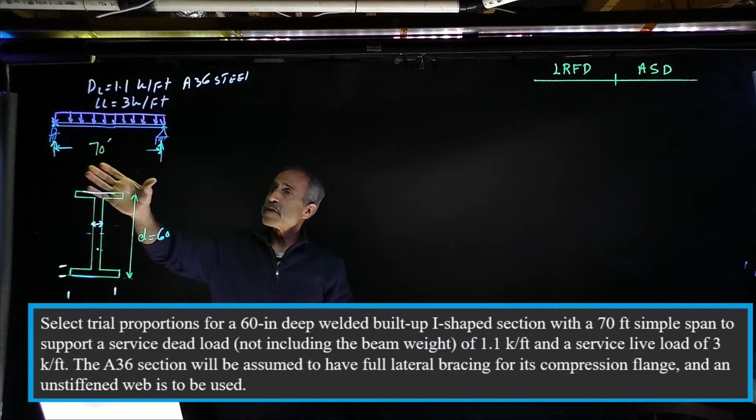Last episode we did the cover plate, and today we're going to go ahead and design a plate girder. So take a look at the problem. As we go along, I'll put stuff on the board so you can see where everything comes from.

We have this beam about 70 feet long, and we want to design a plate girder for it. Possibly 60-inch would be good, and normally the depth could be anywhere from 1/6 to 1/15. In this case, for 70 feet, it comes out to 1/14. So the dead load given for this situation is 1.1 kip per foot, not including the weight of the beam, and the live load is 3 kip per foot.

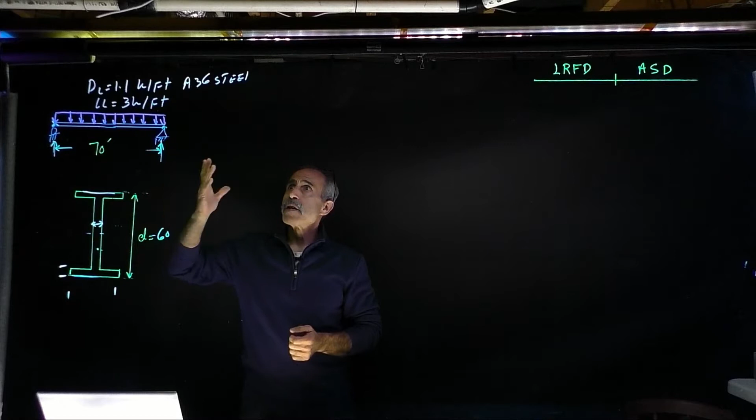A36 steel. But before we go ahead and calculate the moment and shear, let's find out the approximate, as close as possible, weight of the beam, and then we can add that in.

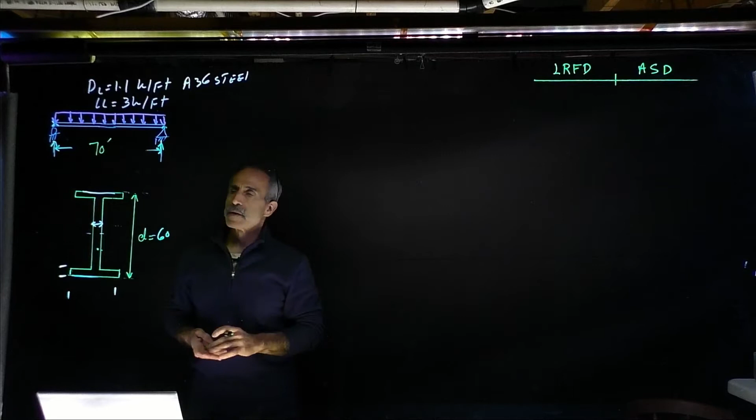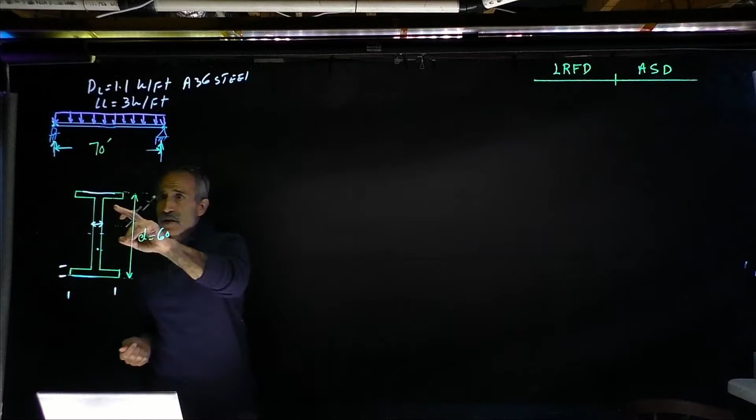Okay, so we're going to build this girder from the ground up. We're going to use 60-inch, we want it to be 60-inch tall. That means the web plate is going to be probably 58-inch from here to here. And let's say we're going to make this about 1 inch thick. Let's guess at 15 inches. Later on we can figure out how close we are.

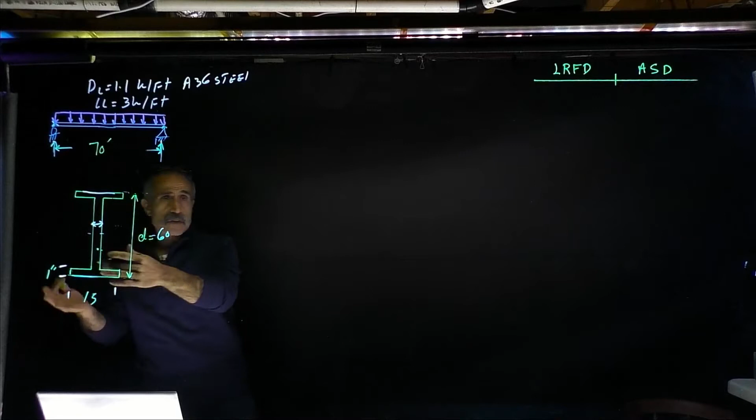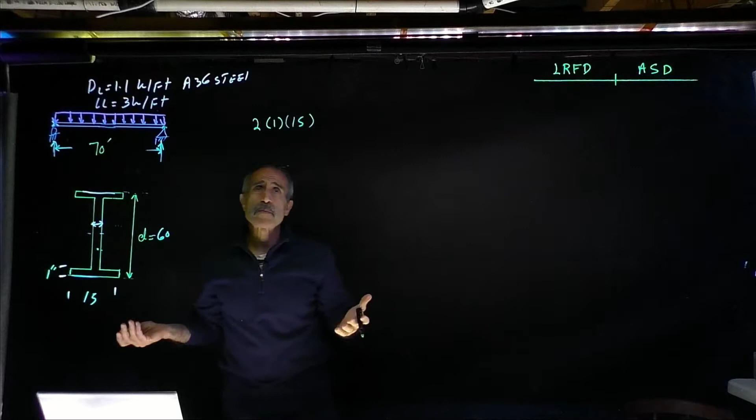Let's calculate the weight of this whole thing. So we've got two 15 inches by 1, and that's 2 of them. The area is going to be 1 times 15. And we know steel is about 490 pounds per cubic foot. So 1 times 15 inch, divide that by 12 times 12, 144, so the area comes out in square feet, and multiply by 490.

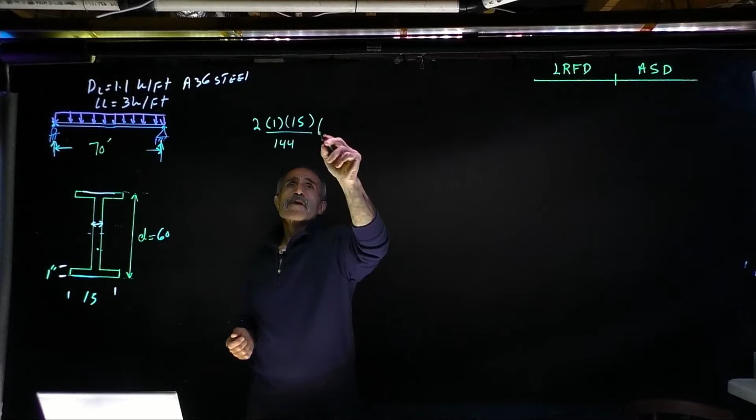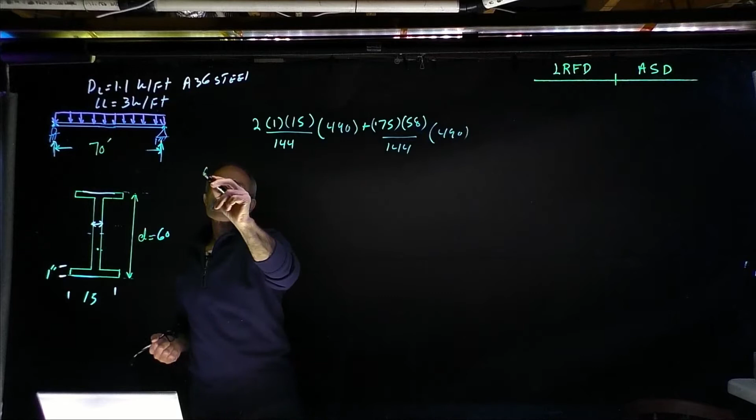Then plus the web, let's say is 3/4 inch thick, which is 0.75, multiplied by, instead of 60, take 2 inch off, that'll be 58 inch. That's the area of the web, divide that by 144, and multiply by 490, and the weight of the steel comes out to 250 pounds per foot.

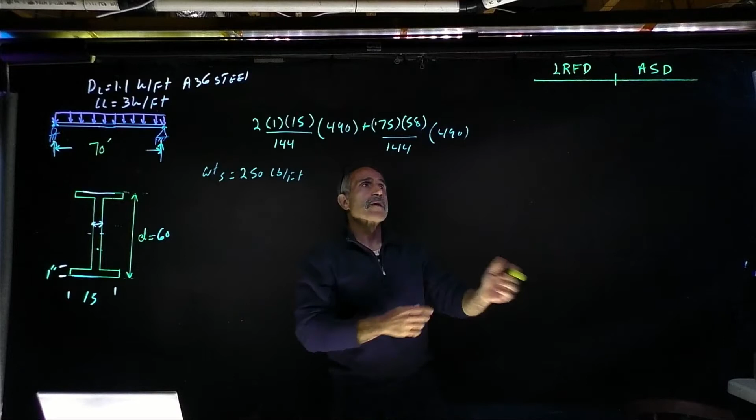So now we have that, we'll go ahead and calculate the shear and moment, but first we're going to find out, in load resistance factor design, what our load is going to be.

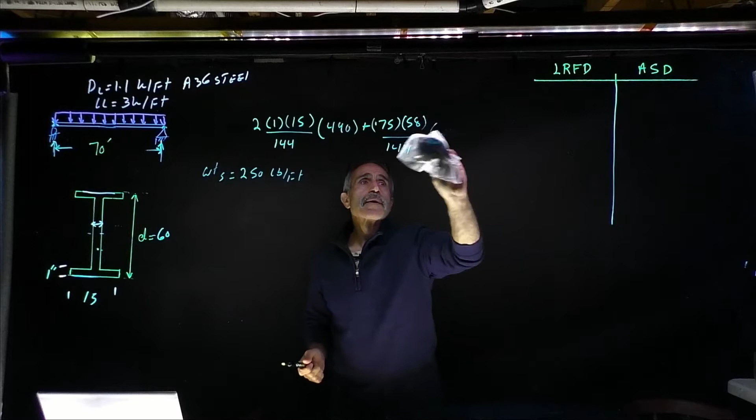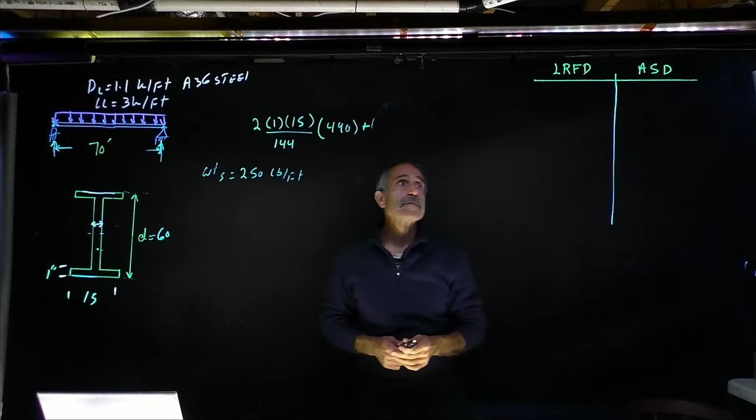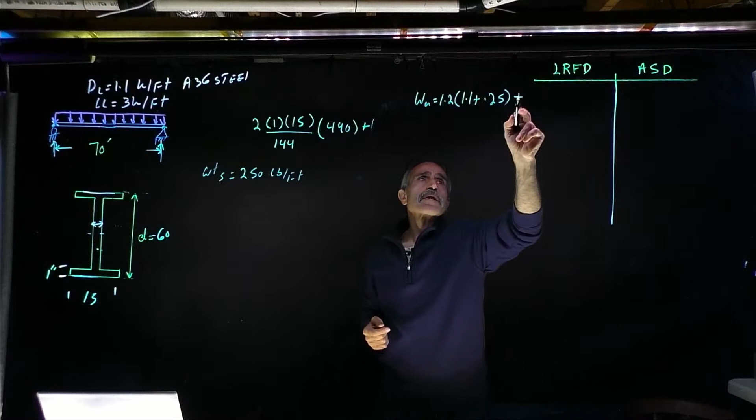We're going to have 1.2 times dead load. So WU equals 1.2 times dead load, 1.1 plus 250 pounds, 0.25, plus 1.6 live load, which is 3 kips. That comes out to 6.42 kip per foot. So let's stay here.

And the maximum moment for a shape like that is going to be Mu equals WL squared divided by 8. 6.42 multiplied by L, 70 feet squared, divide the whole thing by 8, and that comes out to 3,932 kip-foot, or foot-kip.

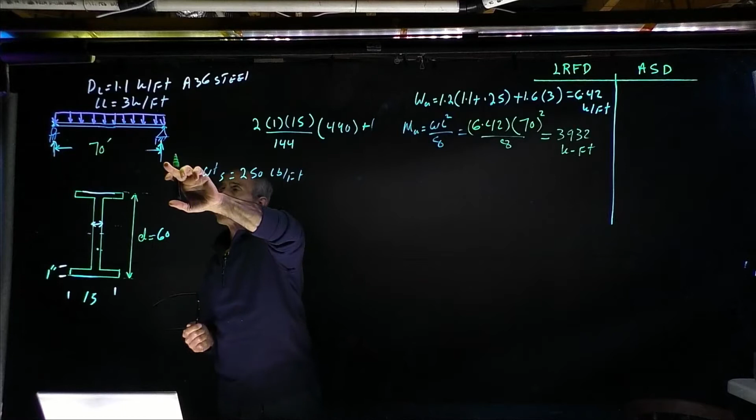So the shear, which is the reaction right here, comes out to WL divided by 2. We're going to say RU equals WL divided by 2. W came out 6.42, multiplied by 70, divide that by 2, and that's 224.7 kip.

Going over to allowable stress design, that's going to come out to WA equals, basically we're going to add the load. It'd be 1.1 for dead load plus 250 pounds for the beam weight plus live load of 3, and that comes out to 4.35 kip per foot.

So our moment, MA, comes out to WL squared divided by 8, which is 4.35 times 70 squared divided by 8, and that's 2664, that's a foot-kip.

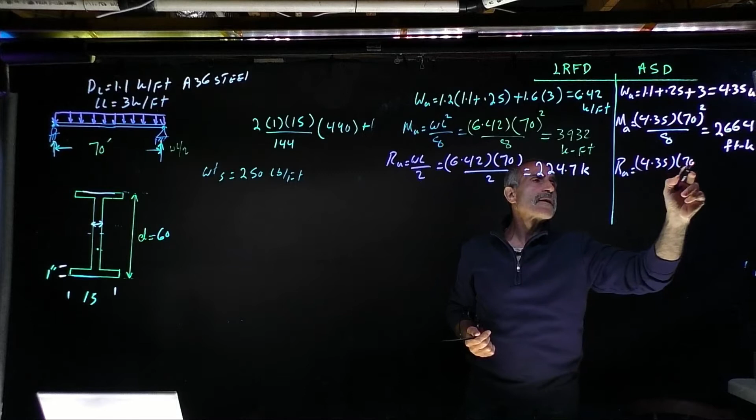And shear is going to come out to WL divided by 2, W is 4.35, L is 70, divided by 2. Now what we have here is the moment due to applied load for the load that we designed for. Because we know the moment, we say okay, for this type of moment, what is the required plastic section modulus? And we take it from there.

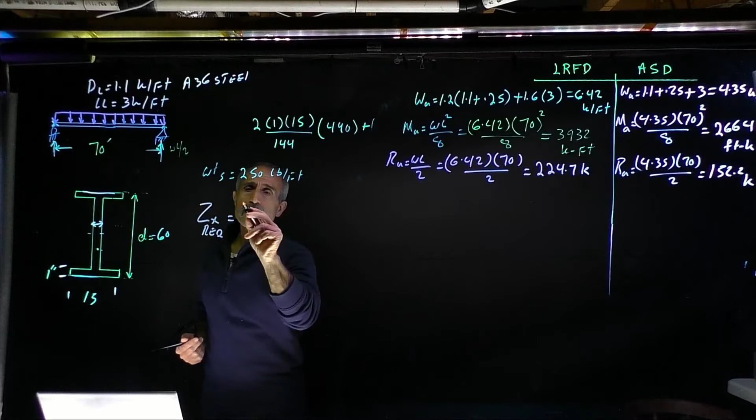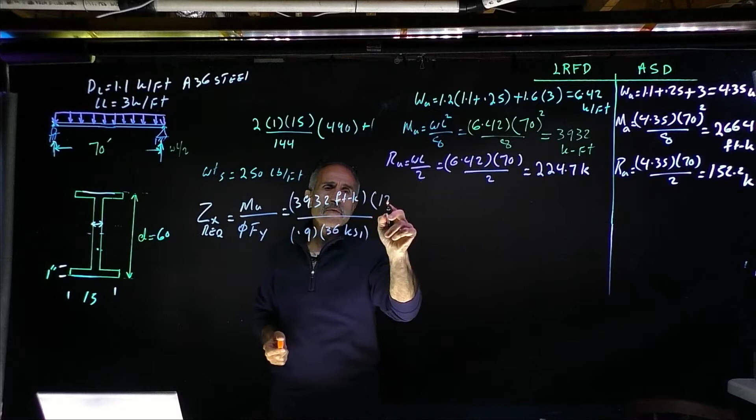So we're going to say Z required, that's ZX, and we know the formula, which is Mu divided by phi times Fy. So our Mu comes out to 3,932, remember it's a foot-kip, divided by 0.9 which is phi, and Fy is 36 KSI. So we got a problem here because this is in inches, that's in feet, so let's multiply this by 12 to make it inches, and therefore our Z comes out to 1456 inch to the power 3.

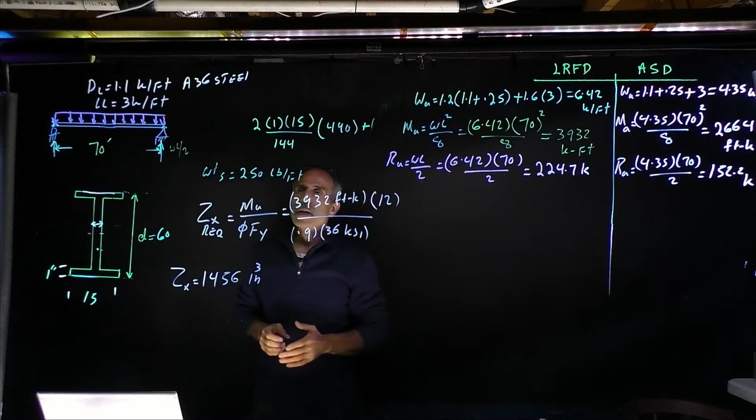Next thing we want to find out is whether this web we came up with, the 58-inch web, is compact, meeting the requirement of AISC. That's based on the table you can see on the board, table B4. In order for it to be compact, it has to be less than 3.76 times the square root of E divided by Fy, and that is the case here.

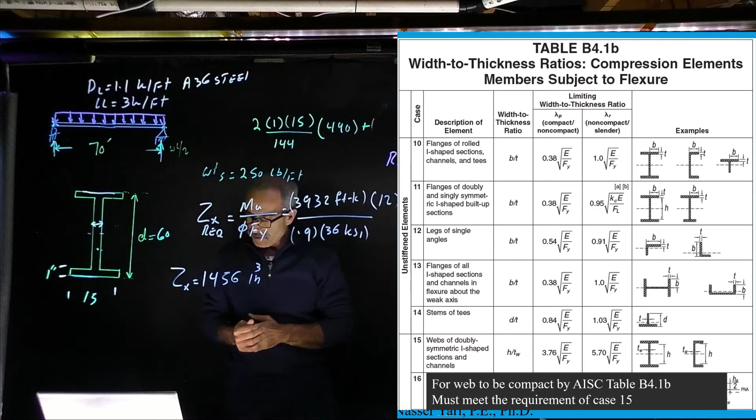So let's go ahead and find out what that is, and we can figure that out. We have H divided by TW should be less than or equal to 3.76 times the square root of E divided by FY, and this is really a number you really should know instead of calculating many times. So that comes out to 3.76 times 29,000 KSI divided by 36. And that number comes out to 106.7. So what is our H divided by TW?

We said that our web is about 58 inches. That's our limit. We knew that. But one thing we don't know is how thick we should make this member. So at the beginning we guessed that. I said, let's make it 3/4 inch so we can guess at the weight. It's not 0.75. Let's find out what is the minimum that we need to do to satisfy this requirement.

So we know our H, which was from here to here 60, minus 1 inch here, 1 inch here, so minus 2 inches, and that's 58. But our TW that we require is basically this number divided by that, so that will be 58 divided by 106.7, so that's...

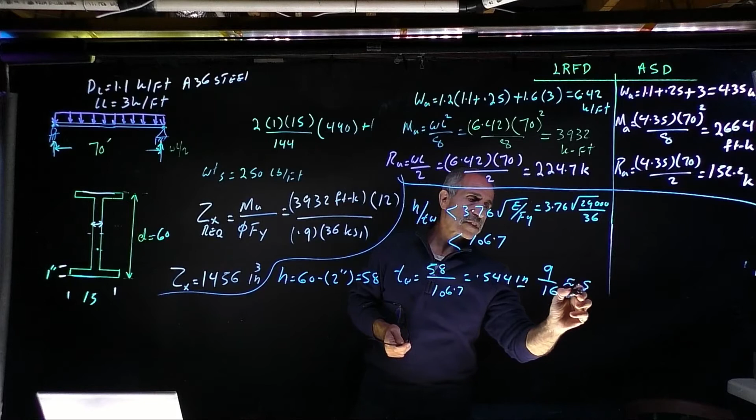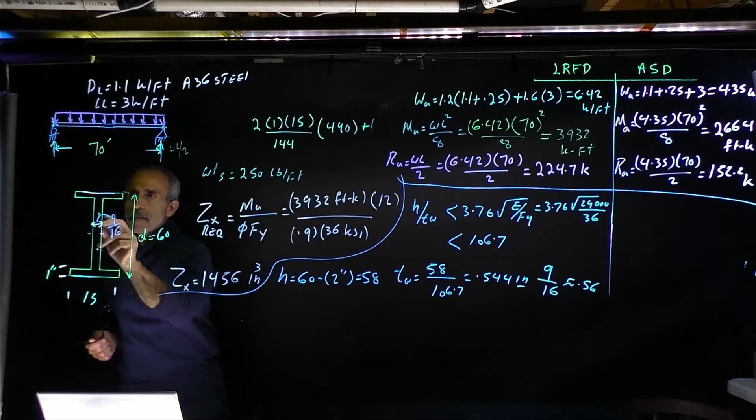In this case, say, okay, let's go 9/16. Is 0.56. Our plate, it's going to become here, it's going to be that is a 9/16. So this plate is going to be basically 58 by 9/16.

And then H over TW comes out 58 divided by 9/16, and 103.1, which is less than 106.7. Too close, but let's just go ahead and follow this for now. Erase the board, and then we can continue.

Okay, we know this section is compact. We want to know if we need any stiffeners. In order to have a requirement for stiffeners, two things are going to happen. Number one, from section G2, note number 2 that reads, it's on a board, it says it has to be the H over TW got to be bigger than 2.46

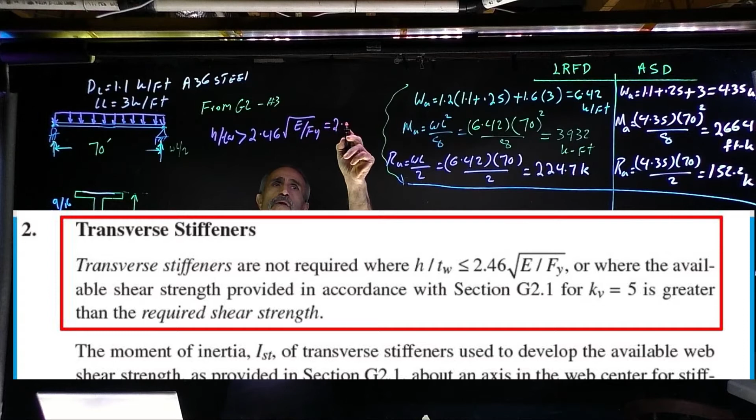square root of E divided by FY, which this number comes out basically 2.46. That's a 4 times the square root of 29,000 divided by 36, and H over TW has to be bigger than that, which is 69.8, and we just calculated this a while ago that I erased it, that came out to 103. So this is a 103.

So this says we require to put transverse stiffeners. However, but you got to meet the second condition. The second requirement is our web. We got to find the capacity of the shear in the web, and that capacity, if it is less than that, right here, the shear applied by the load, then we say, okay, stiffener is required. But if the capacity of the web itself is bigger than this, then we don't need it, because we know the web is strong enough.

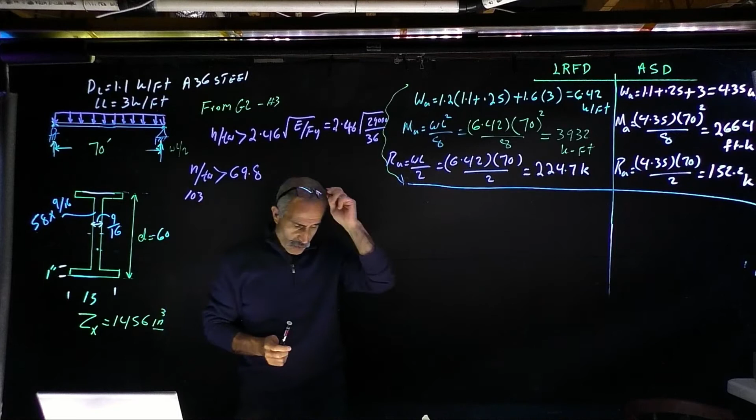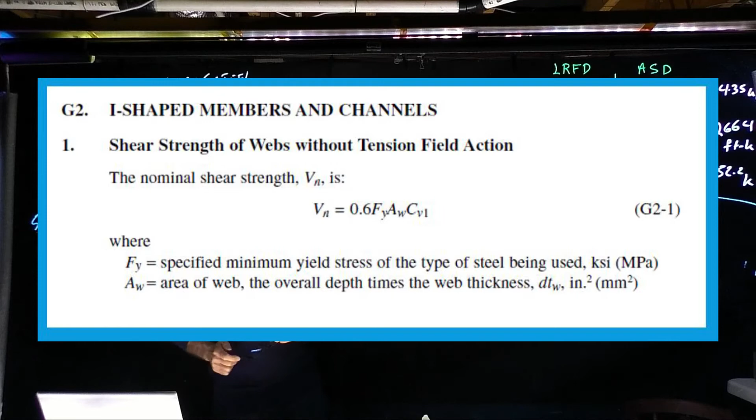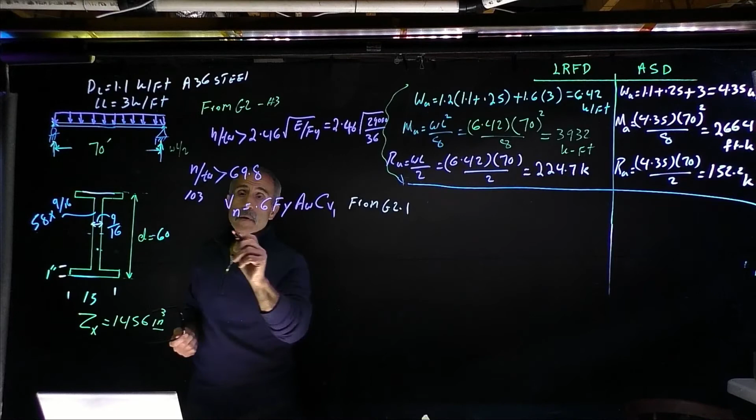So let's go ahead and get to work. Capacity of the plate, for this web plate, VN is equal to 0.6 FY times area of the web times CV1. So we got to find CV1 before we can use this equation. To find CV1, we're going to go back to the spec in G2 section, and that is going to be G2.1. So our H divided by TW, which is equal to 103, it should be bigger than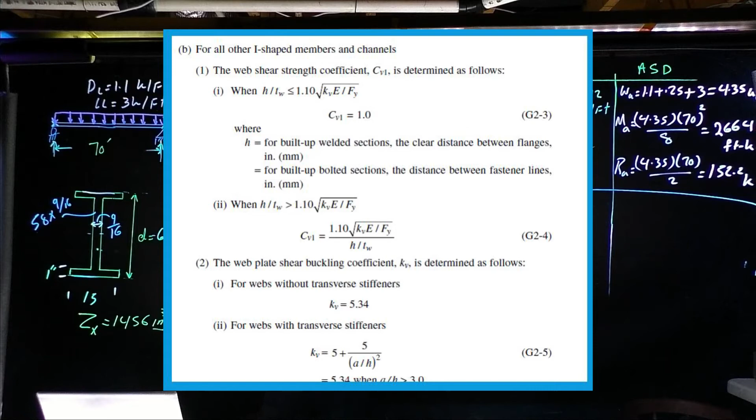1.1 times the square root of kV times E divided by FY. And now we have another unknown, kV. Looking at the same spec, kV is given to us by that spec as 5.34, which is equal to 1.1 times the square root of 5.34 times 29,000 KSI divided by 36, and that's 72.15.

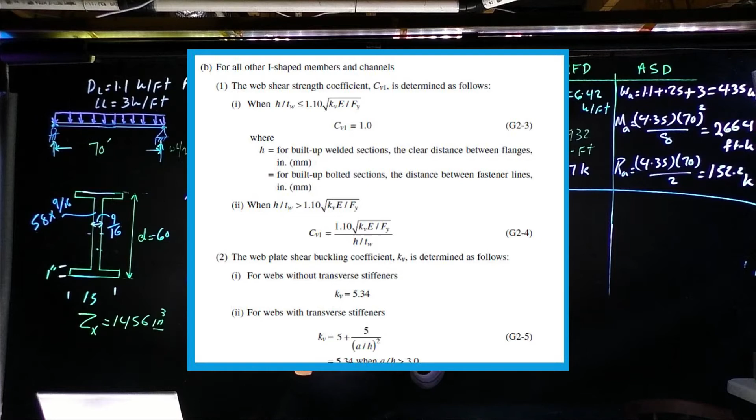All right, therefore now we know that, and we got to find out our CV. So now that we have met this condition from G2-4, we have CV is equal to 1.1 times the square root of kV times E divided by FY, and divide the whole thing by H divided by TW.

And plug in all the numbers we have: 1.1 times the square root of kV, which came out to be 5.34, and 29,000 KSI divided by 36, and divide the whole thing by 103, H 103, and therefore our CV comes out to... So now we're going to go ahead and calculate VN, and VN is equal to 0.6 times 36, which is FY, and that's that equation. AW, area of the web, we said it was 9/16 times 58, and multiply by CV1 which is 0.7.

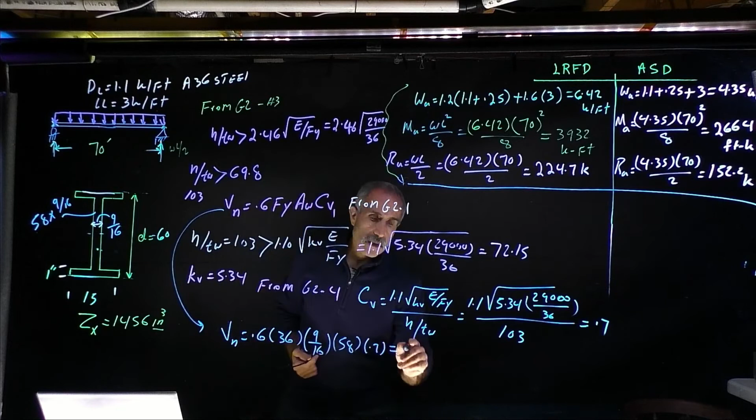Comes out to 493.1 kip. So okay, I had to erase the board, I need some room here. So this came out to our shear capacity of this plate.

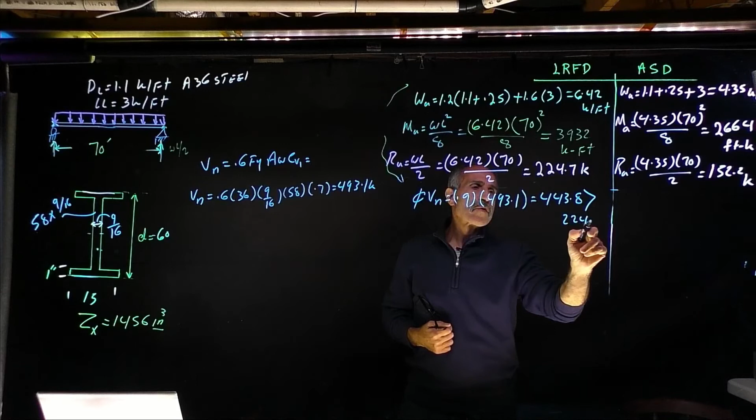But because we're doing both load resistance factor design and allowable stress design, we're going to bring it over here and put our resistance factor to it, see how it's going to be. So phi VN is equal to 0.9 times 493.1. That comes out to 443.8, which is way more than 224.7. Therefore, using load resistance factor design, we don't need any stiffeners.

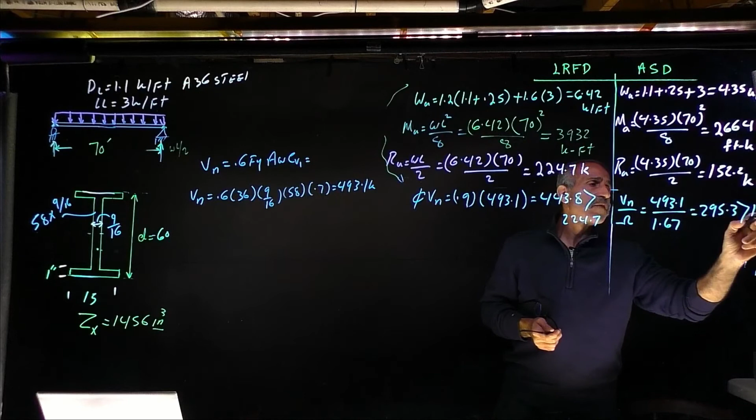So if we go to allowable stress design, it's going to become Vn divided by omega, and that was 493.1 divided by 1.67, comes out to 295.3, which is bigger than 152. So it checks out, we don't need any stiffeners. So now we're done with that.

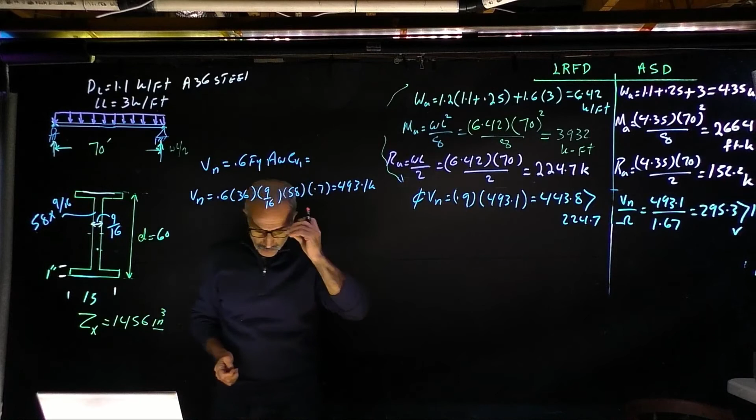Let's go focus on the flange. I want to know what the area of our flange is. We guessed at 1 by 15. So the area of the flange is given by the equation. It's on the board, let me write it down here. So AF is equal to...

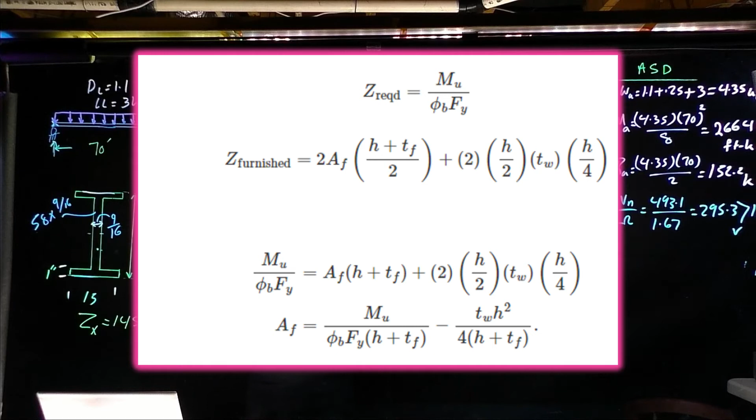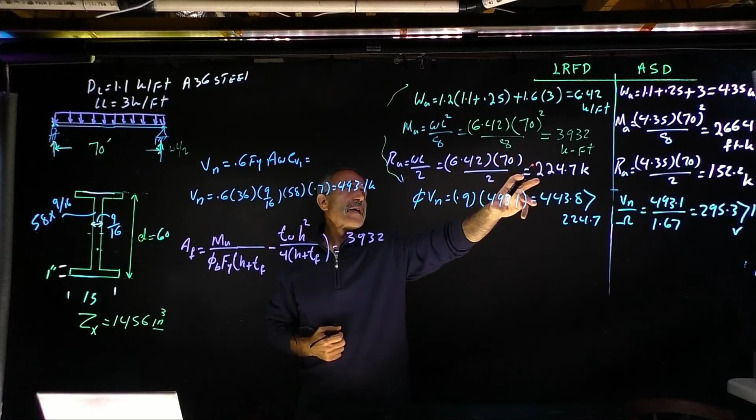mu divided by phi B. So the area of the flange is given by this, and mu came out to be 3932. Be careful, that's going to be a foot kip, so we've got to make sure we divide it by 12 to make it an inch kip, because everything else is in inches. Divide that by 0.9 times 36 KSI times H plus TF.

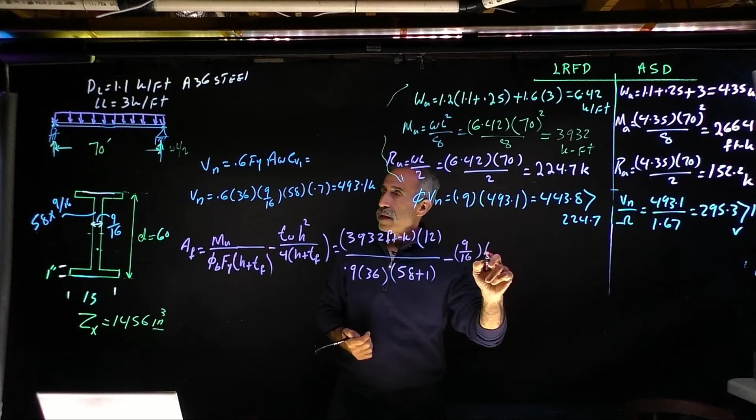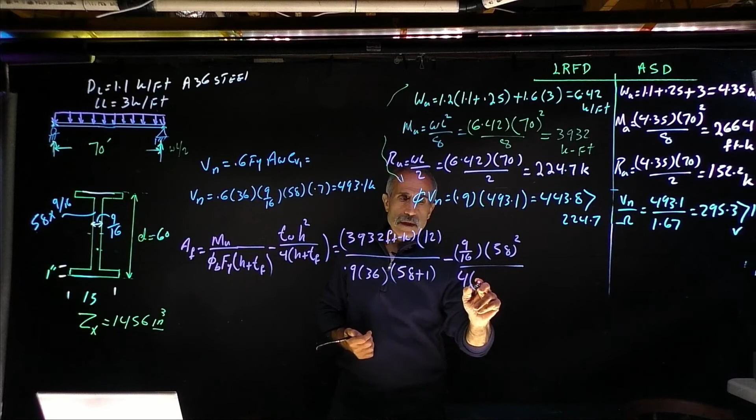Our H came out to 58, and our TF is 1 inch. Then minus TW, which was 9/16, multiplied by H squared, 58 squared, divided by 4 times H is 58 plus 1, equals 16.66 inch squared. And we said 1 by 15, so our assumption was kind of not good. Let's change that to a number.

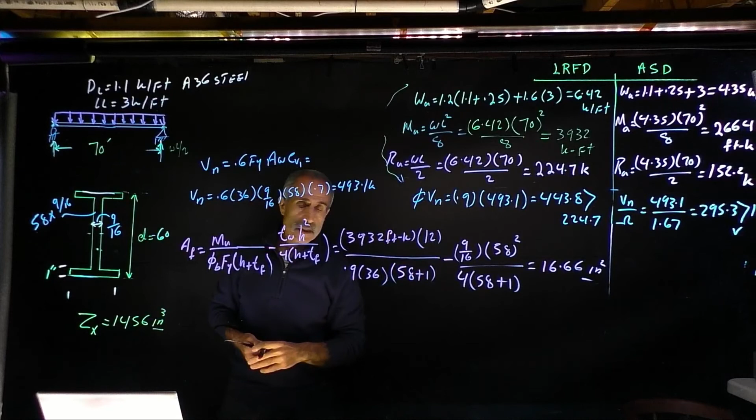Let's go a couple numbers high up, say 18 inches, good. Okay, let's try 1 by 18, so make this 18 inches. So now we have come up with the size for the flange, which is 1 by 18.

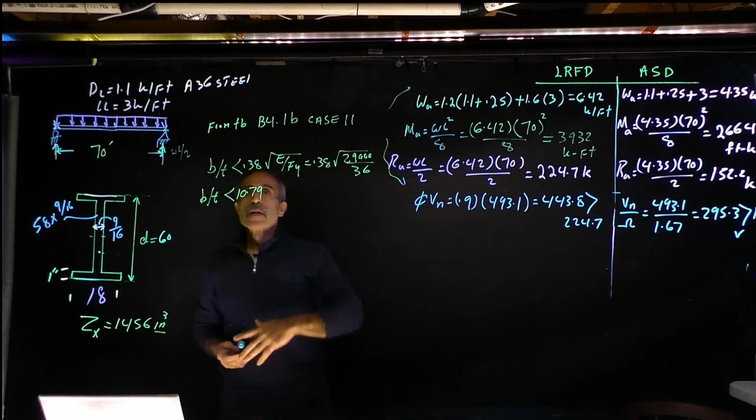Want to make sure it's compact, just like we did with the web. Go back to the table again, B4.1, case 11, it says B over T has to be less than that to become compact, and this number comes out to 10.79. So what is B over T? Our B is 18 inch.

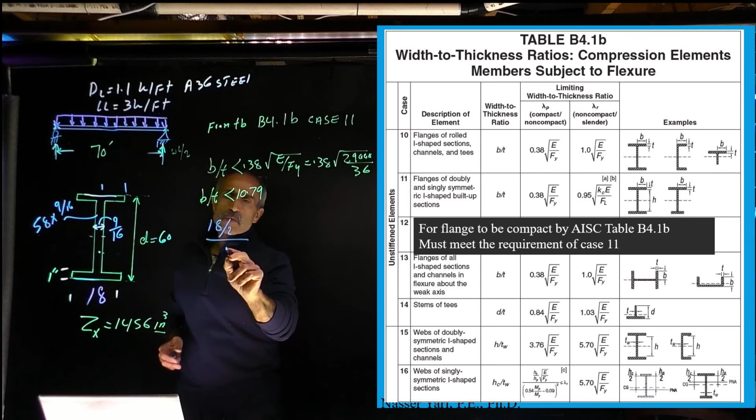Look at the picture, the picture shows the B is from here to here. So it's basically 18 divided by 2, that's our B, divided by T, and T is 1 inch. So that comes out to 9, and 9 is less than 10.79, so we're good over here.

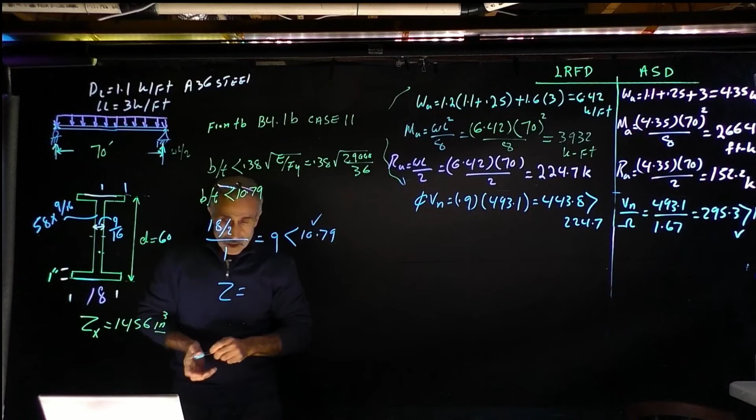We have designed this, we come up with this shape here. Let's find out what the actual Z of this shape is. Z is equal, and we talked about it, first we've got to find a plastic neutral axis. So we've got 2 plates, there's 2 of them, 2 times, and the area of the plate is 1 by 18. 1 times 18, that's the area of the plate, or it'd be the flange in this case.

And then the distance between the center of this and right here, this distance is 58, so that's 58 divided by 2 times 58 divided by 2, and the center here is about, this is 1 inch, so it's half an inch. So 58 divided by 2 plus half inch, plus 0.5.

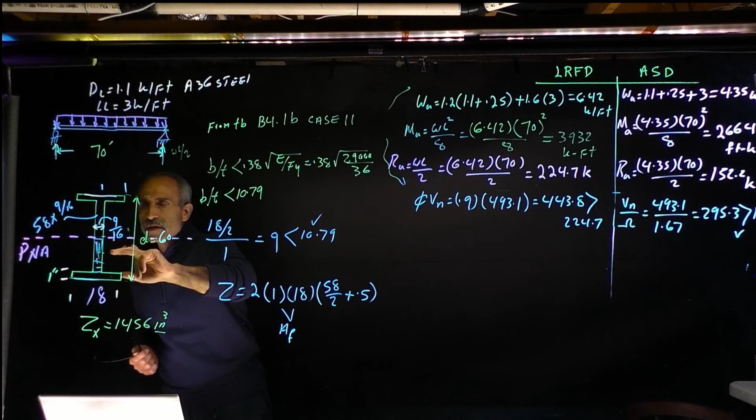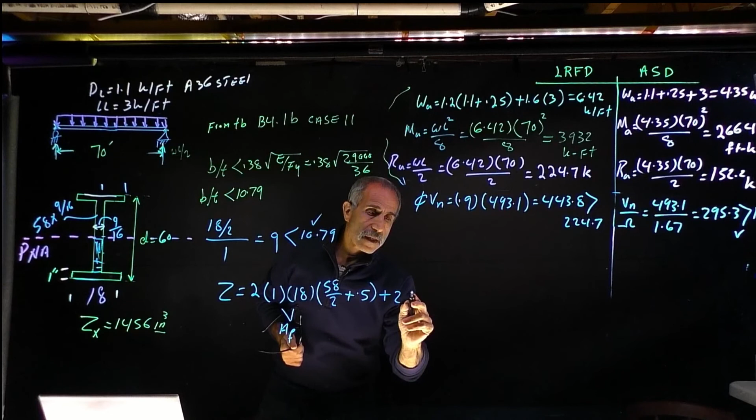So the next thing we're going to do is the web. So the area of this area right here, which is 2 of them, it's going to be 1 and 2, let's say 2 plus 2, and the area is 9/16 times 58 divided by 2. So that's 58 divided by 2, and the distance from here to there is 58 divided by 4.

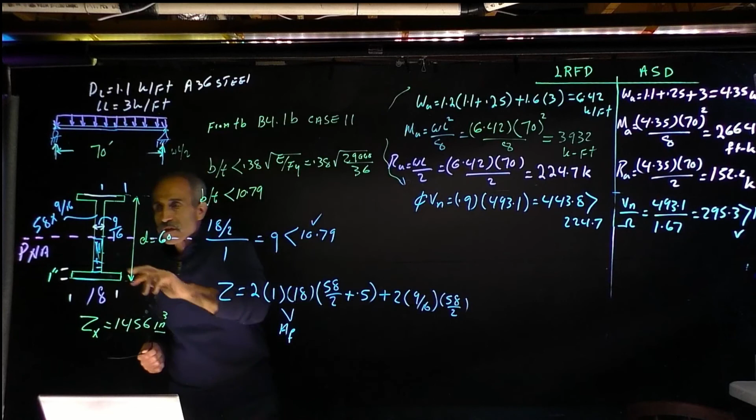And 1535, which came out bigger than 1456.

One of the things, let's check in, because I want to convert this back to a moment, see if it's going to make it, which normally does. If it's going to beat this, then it's okay. But we said it was, I erased it. We said the steel, the way we had it was 250 pounds. Let's see what the exact weight of this steel comes out to be.

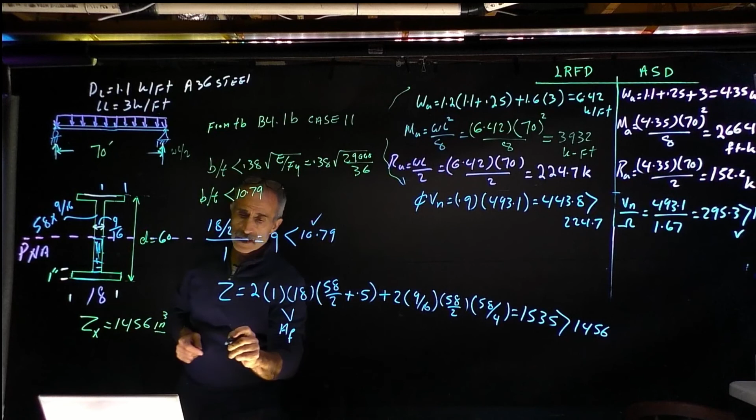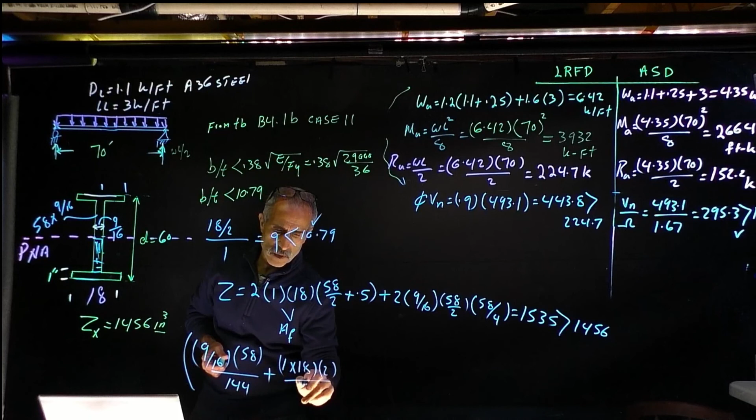So we had 9/16 times 58, that's the area of the web, divided by 144, plus the plate was 1 by 18, 1 by 18, there were 2 of them, times 2, divided by 144, and multiplied by 490 pounds per cubic foot. So that comes out to 233 pounds, which is less than the 250 that we guessed originally, which is okay right there.

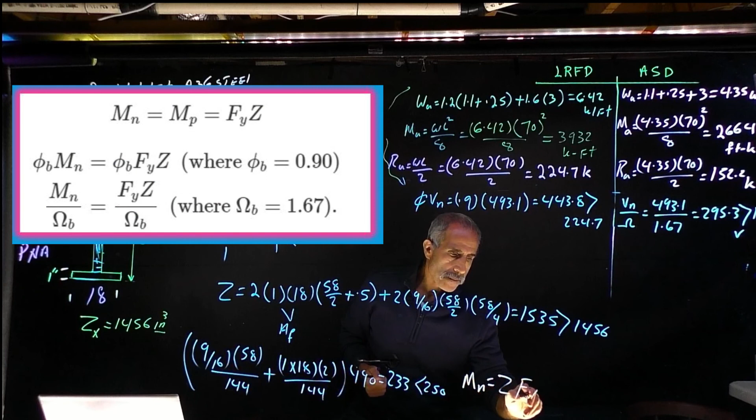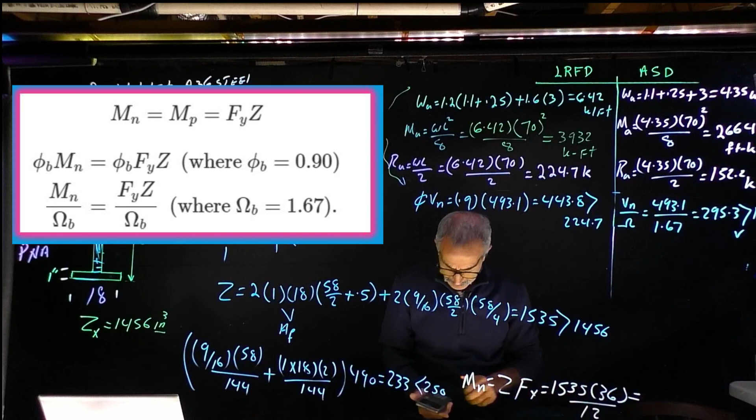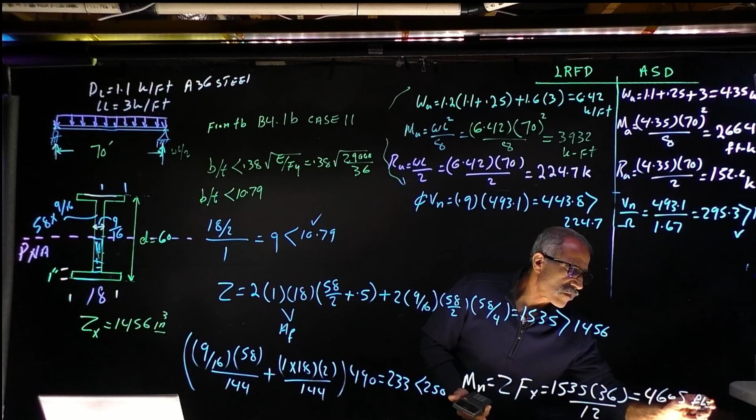And we now want to know what this Z is doing here. So now our MN is equal to Z total, which is this right here, times Fy, which is equal to 1535 times 36, and that comes out to... let's divide this by 12 first to make it a foot kip, and... 4,605 foot kip. Check my number, and then we're going to come back up here.

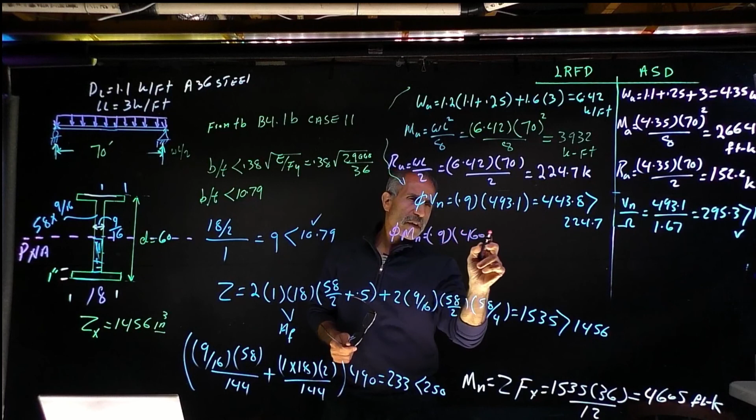Phi times MN is 0.9 multiplied by 4605, 4144.5, which is bigger than 3932, so we're good. And back in here, we want to double check it.

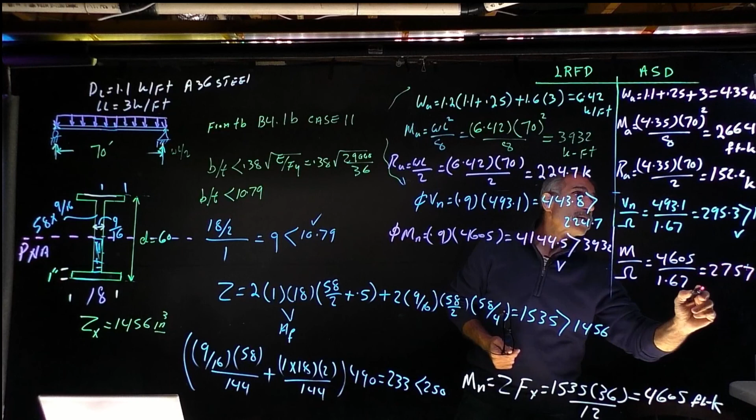We're going to say M divided by omega comes out to 4605 divided by 1.67, 2757, which is bigger than 2664, and checks out.